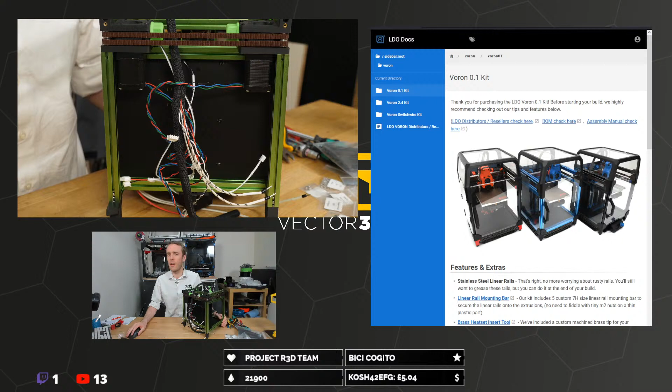It's wiring focused on the bulk of the wiring. So because we've got this LDO kit and they've done a good job getting everything pre-prepared with the wiring, they do have their own little extra guide that you can follow to help you do everything according to their setup. It's not massively different, but it should be a little bit helpful.

So in here, this is in the video description by the way, go into the wiring guide. It's like all of this stuff's pre-wired, so just enjoy. Basically I have got the normal guide on the other screen, which you can't see, so if I need to reference that I can, but hopefully won't need to.

I do need the wires though, they're over in this box over here. If I don't have any wires, wiring does tend to be a bit difficult. And there is, of course, a printed part for this as well, isn't there?

Don't know what I've done with that. There's a big green box somewhere. I've got a green box and I've got a black box, and I've got some mounts, and I've got some power supply covers. So...

This is a box of wires. That's the mains thing, that's a cable, that's a Raspberry Pi, that's a 5-volt supply. SD card I don't think we need at the moment. We do need this, we do need this, we need a control board, we need a cable management-y thing.

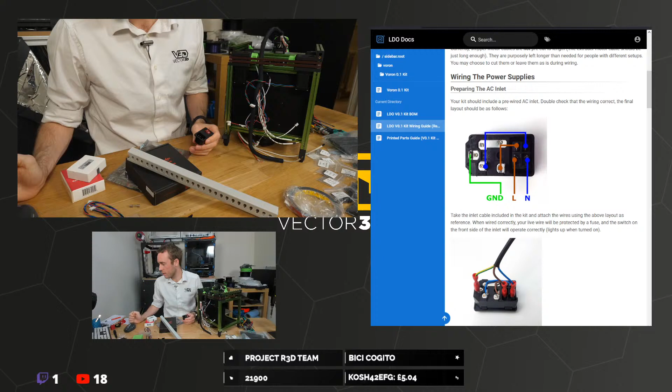Okay, this bit looks good. Attach the wires above using that when wired correctly. So we've got hopefully some.

Let's put that fuse away, don't need that. I think 3 amps or so would probably be right, 1 amp's definitely not enough. I don't know, I think it'll be okay.

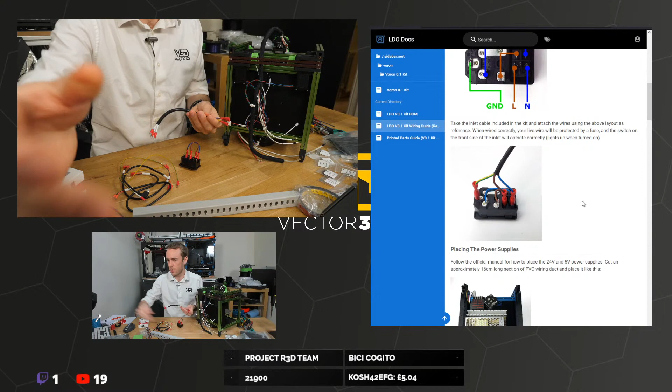So we've got this, so we've got a short harness for mains wiring, nicely labelled as well - ground, live, neutral. All the right colours, all nicely crimped. Very, very nice. So we've just got to make sure we stick everything in the right place.

So brown, obviously opposite brown. Bit fiddly with everything already in the way. Blue goes opposite blue. Keep that earth one out of the way.

Oh, this is a bit tight. Oh, come on. There we go.

The very important earth as well. These are very tight.

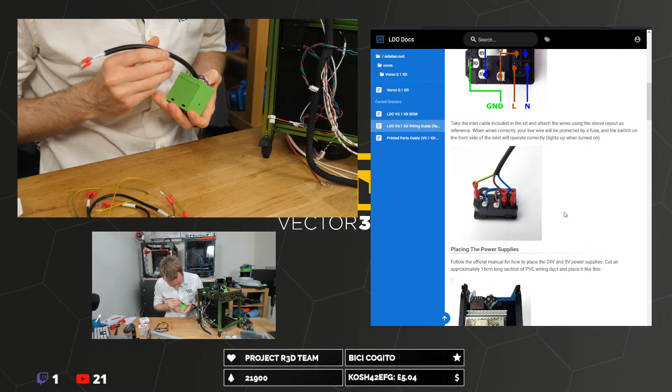There's a screw hole or a hole of something there. Hopefully that's - dunno. Not going to be difficult now that I've put that in. Oh, it's a heatset insert. Okay, let's do that.

And we're going to need to choose the right ones of these as well. That definitely looks better than that one. This one looks a bit under extruded, strangely. So I might go with the other one, so that and that. These can go away. Don't need that bag. Don't need that.

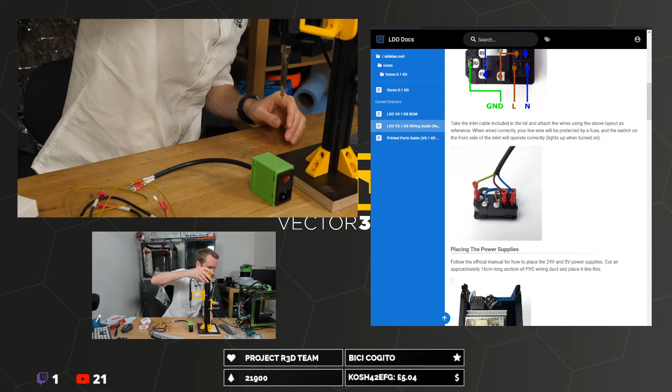Okay, this looks ready, so let's put this in. Easy peasy. So that's that part ticked off.

So for, it's now saying follow the original guide for some of these bits here. So if we switch to - we need to turn on PDF and off this. Yep, so it's kind of, I feel like I'm going to be following two instruction manuals at the same time here.

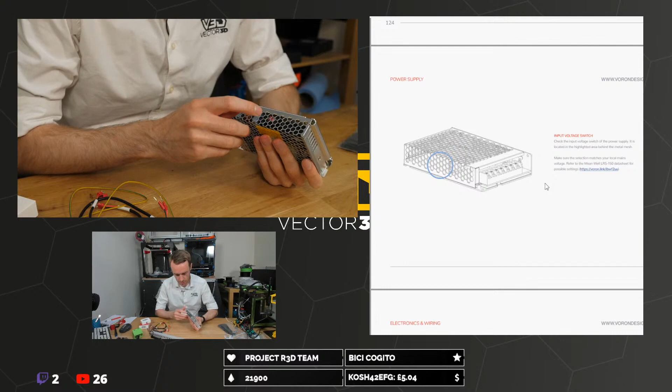So firstly, check the switch, set to 230 volts, so that's good for me in the UK.

VHB tape is double-sided and sensitive, pressure-sensitive adhesive tape. Other vendors have similar products that can be used as substitutes. Support the deck panel with one hand and firmly press the power supply against the panel to achieve a strong bond. Should you distrust modern adhesives, alternatively you can mount it by drilling 2 holes in the deck panel.

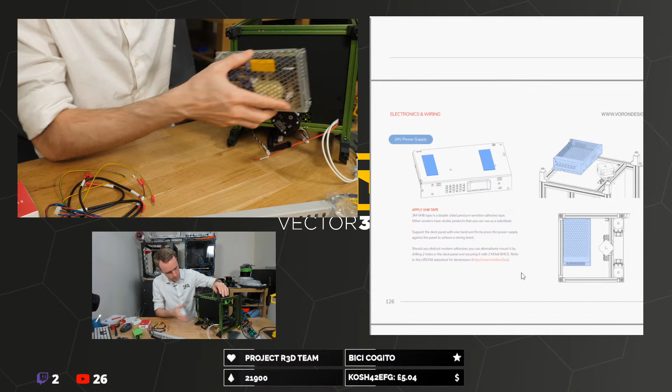So, which way round are we looking at? So the back is closest to that side, so it looks like that position there, up in that corner, press it down. We're going to need to move the bed.

Okay, so where's my tape?

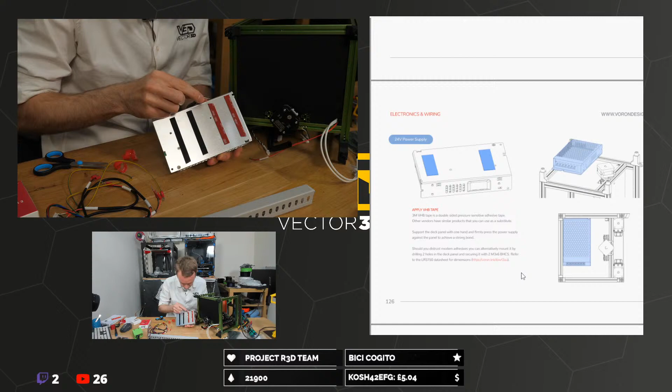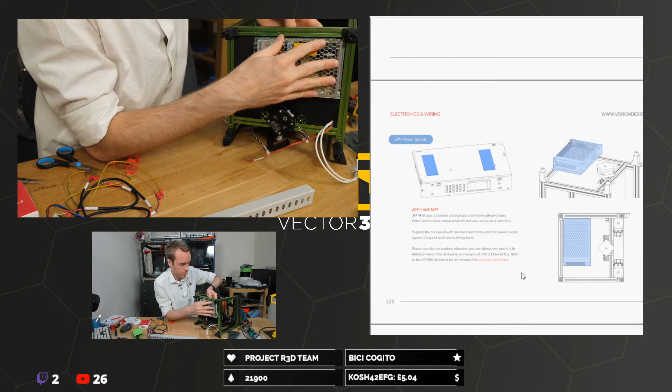I don't want it quite touching the walls. I want a little gap just to prevent any contact if it's rattling or something. Oh, that's just spun round. There's nothing to index the position of the feet, so they can just spin, which is kind of weird. Guess I could do it a little tighter.

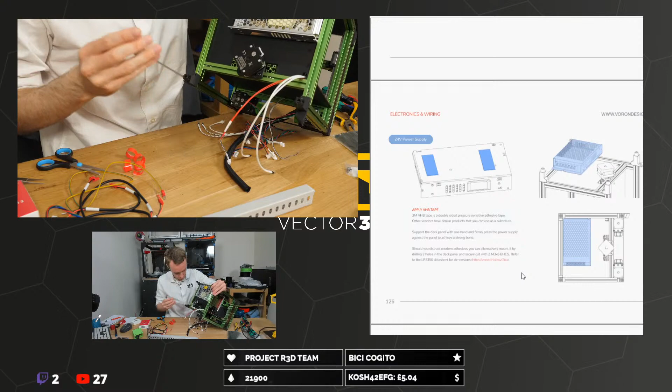I don't think I used any Loctite on them, which maybe is why if they're coming loose already, that would be a bit weird, but...

Okay, so now we've got to mount the 5-volt power supply as well, a 5-volt DC-DC converter, so we've got a little thing for that. Where's that little box? Over here. So this will take in the 24 volts of this power supply and convert it to 5 volts for the Raspberry Pi.

And we're mounting this up the other way, so let's turn this upside down. It's coming up here, so somewhere about there by the looks of it. It looks like we've got 2 nuts in here, so it's going to be using those, and we want some M3 by 8mm screws. Still got loads of those.

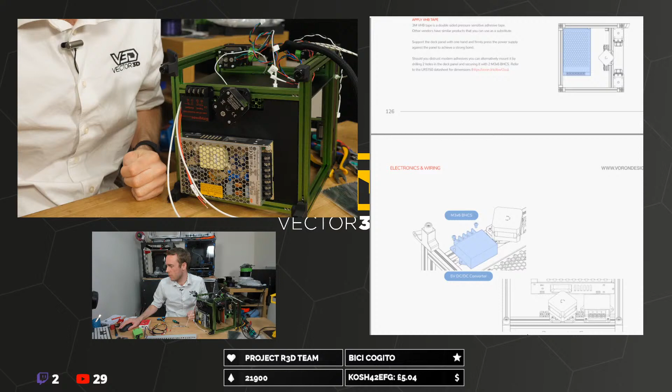16cm long, so I'm looking at the other instructions now. We want a 16cm long piece of this. 16cm is at this notch here. So how does one cut this appropriately? With a blade, cut it easily? Don't feel like a blade is the intended cutting method, but it kind of works, I guess.

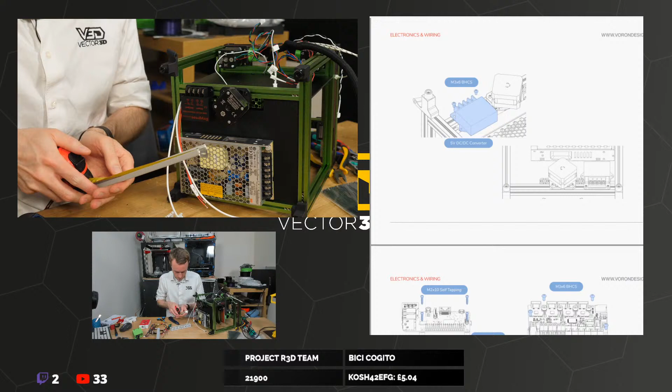Oh, the 2 sides don't align, that's inconvenient. And then we need a 16cm piece of this too. We could use some side cutters or something, might be a bit easier.

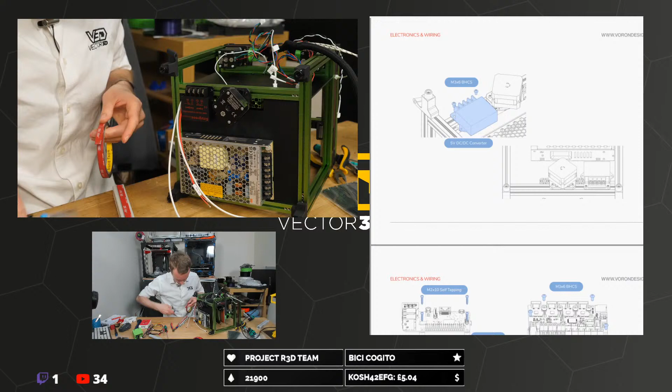So now that we've got this, we need a bit of extra tape to stick that down. Yeah, a little hacksaw probably would have been appropriate, but you know what, this works. Blades are just easier, aren't they, sometimes? Well, it was not really easier, it was just closer. Not particularly a great justification for using it, but there you go.

I'm going to cut this wobbly bit at the end off. So that looks like they want it right in there. It's probably a bit too much VHB tape for one tiny little duct, but...

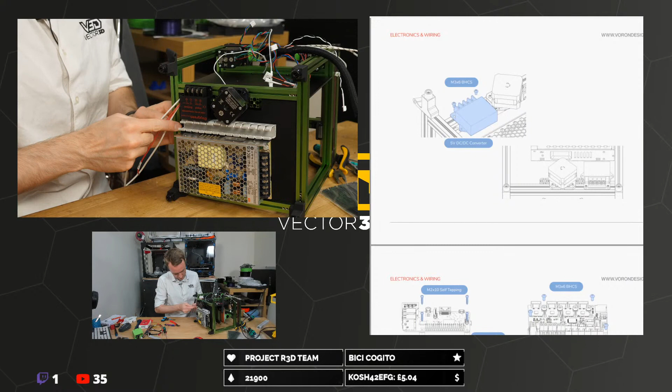Sliding your finger through that's kind of painful. That's probably not recommended, the inside edges are quite sharp.

Let's show this, hide this. So we've just done that, and we've got this in, and we've got that little duct part in there.

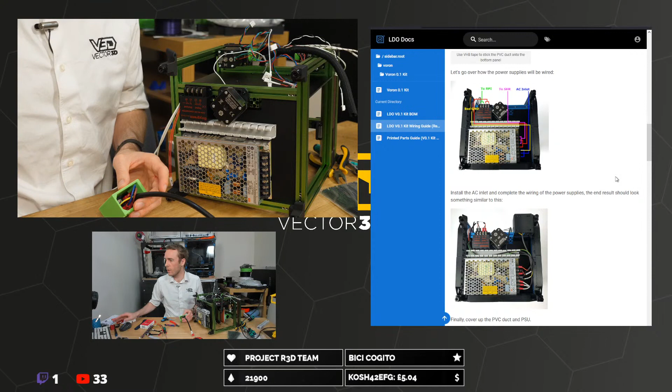So the AC inlet is 3 M3x8s. I know you want to build it stock first, but I would recommend the utility belt top hat mod. It adds a bit of height for the cables to the mini afterburner and PTFE tube, plus LED mounts. Nice!

Well, as I'm going to start testing the two printers behind me now a bit more intensely, I'm going to need some things to print, so mods for other printers is generally quite a good bet, I think. Let's get these in place.

So you've got holes in the top here to help you screw things in, but my drivers are always too fat, which is kind of unfortunate. But I do have a normal Allen key here, and that should go through okay. Yeah.

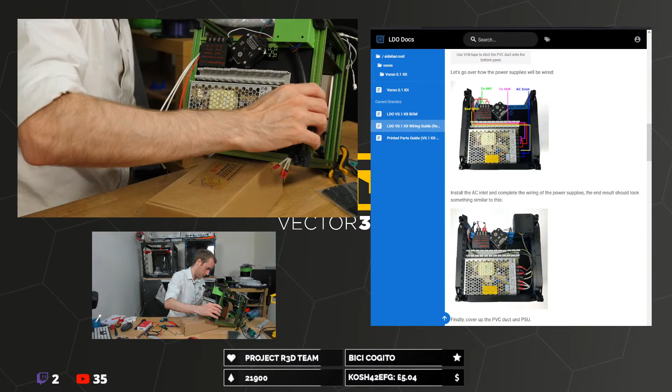So let's get these in. This is long, I guess we can tuck it in once it's installed. Where's my little screwdriver? That needs a crosshead thing. There we go.

We've got spade terminals for this, so you don't need to take the screws all the way out, which is convenient. Earth obviously goes in earth. They are labelled, so blue is labelled N, neutral goes in the N slot.

I have no idea what the sound level is, because as you can see, mine doesn't work yet. Somebody else might be able to help you.

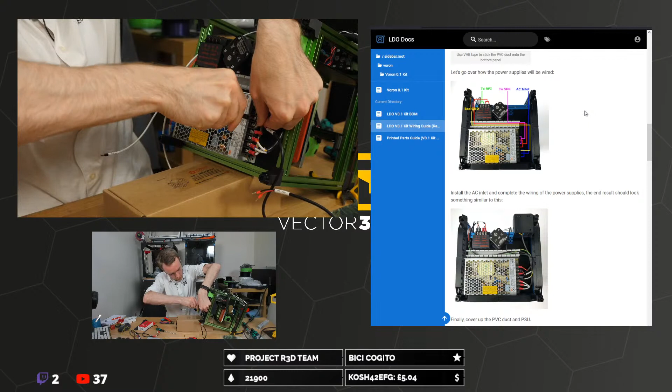One positive. I think we can probably stick that through there and then come out there. Something like that. And then I've got another one here. 24 volts into the 5 volt power supply, so a couple more terminals over here.

Do you have a multimeter handy for continuity testing after wiring? Yes, I mean, I could. I generally don't, to be honest. I can see why you should or could. It wouldn't be a bad idea, that's for sure. It's not something I've done before.

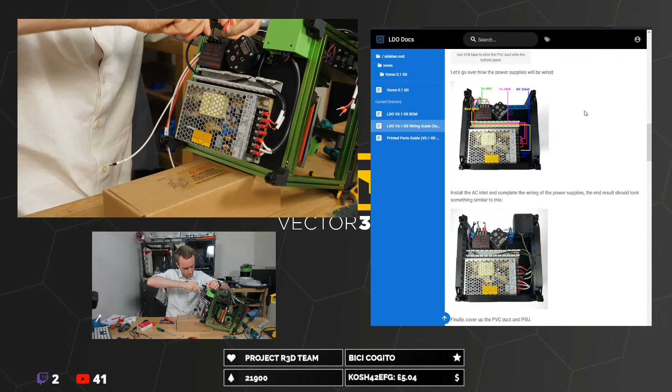So this is then going to come into the power supply up the top here, into the input section. And there. Oh, you can't see.

Let's do a ground test now, shall we? The frame isn't going to be grounded on this one, but it could be sensible. So earth is definitely connected fine, that's the main one.

Finally, cover up the PVC duct and PSU. Oh yes, so we can just stick it. I don't know how much extra length that one has. It's just easier to clip on or press on, who knows. Oh, missed. How did I do that?

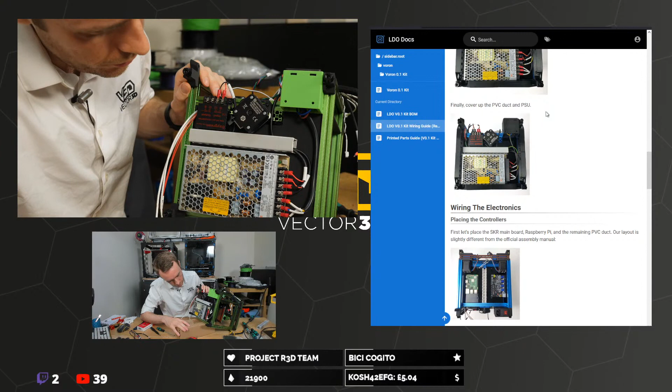We should have a little power supply cover as well. Very nice, that just covers up those terminals so you can't accidentally stick your fingers in there. So that's that lot, that lot, that lot.

Wiring the electronics. So we're moving to the normal back panel area now, so we can take this box away. That's empty, so that can go down there.

Oh, it's sitting on the plus. I was like, what on earth is... There we go. I think I might move that out of the way for a minute, hopefully it might make this initial step easier.

First, let's place the SKR mainboard, Raspberry Pi, and the remaining PVC duct. Our layout's slightly different from the official assembly manual. Okay, so presumably they are still mounting them on the little things though, so we need to put our...

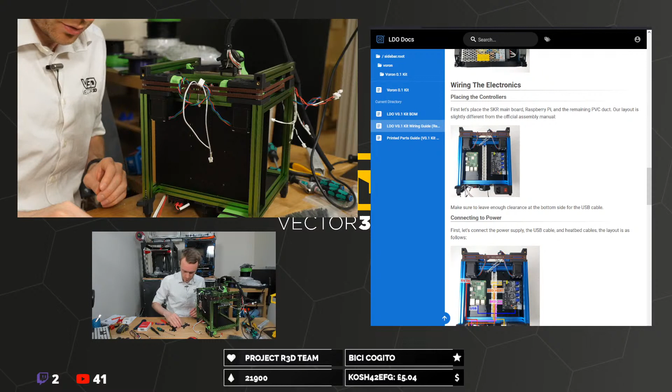Weirdly, these have like screw holes as if we're going to screw them down. It's hard to see if they've actually... Oh yeah, they are screwed onto a thing, okay. But we've got screw holes in it as if they're going to be screwed onto the panel, which would be lovely, but no siree.

Oops, daisy, sorry for that. That's going on here. And the Raspberry Pi's just here. Hello? Open here, okay.

I didn't do my Raspberry Pi power cable. Let's put this in, all the way around this way.

So, presumably that's going to go on there that way around. And this is going on.

It has the weirdest hole pattern, this control board. Like so, okay. So how does it suggest we screw these together?

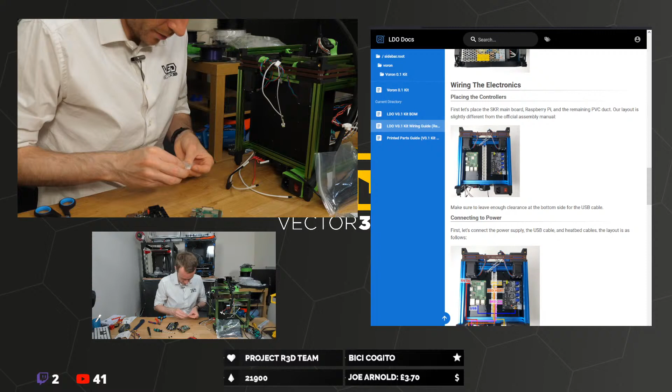So... bloody ball ends.

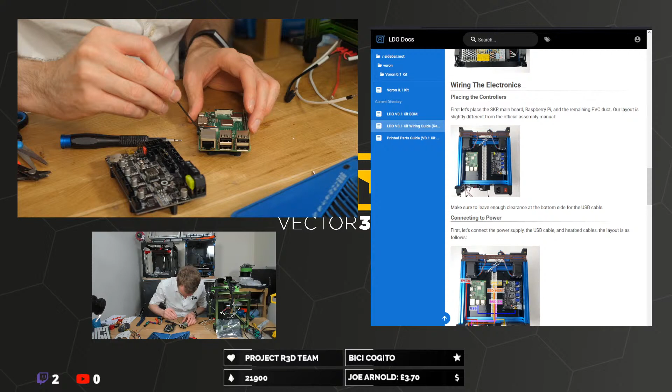Weird. So I wanted to try a different hex for these screws, because the 1.5, which I believe is what they should be, is really loose in here. I can wiggle it like 1/8 of a turn without it even moving.

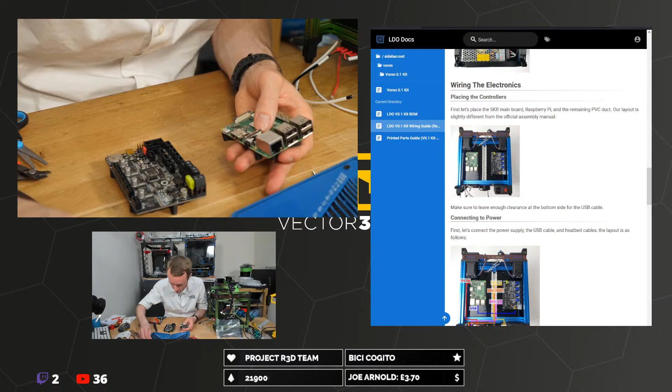So I was wondering if it's closer to an imperial size. No, 1/16 maybe, it's 5/64, but that one's missing. How about for here? I've got a 1.5 of this. Let's see if this fits any better. Well, this is a bit better.

And 36 people showing now.

The LDO kit does not come with a display, no. Display is actually not part of the default design, I believe. It's a mod.

These are really tight to get in.

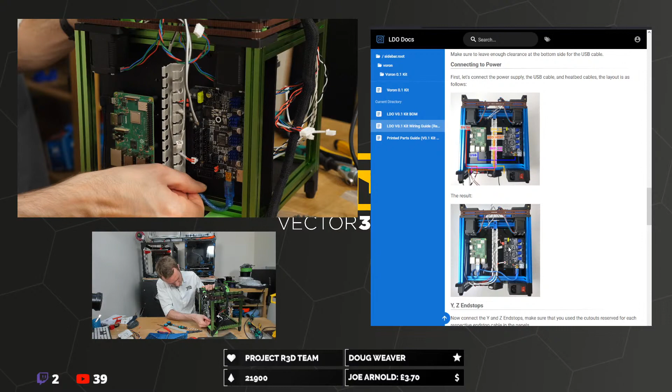That's good, not putting too much strain on any singular position. Now connect to the Y and Z end stops. Make sure that you use the cutouts reserved for each respective end stop in the panel.

Oh, I've not done that top piece of cable, that top panel in here. I don't have this on yet, or this bit, so maybe we should go back to the normal manual for a bit. Bring back PDF reader and hide this.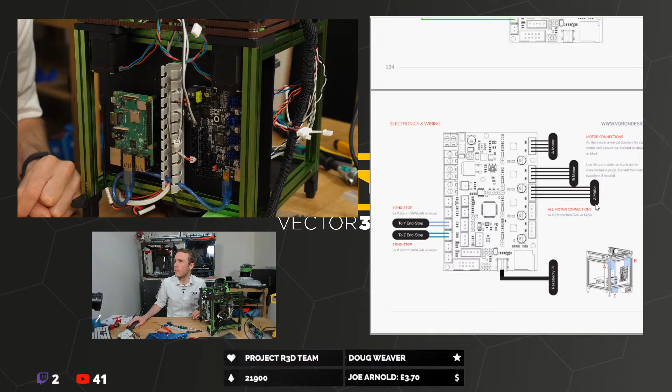So this was power supply, control boards, position them in, obviously slightly different to that. Mains we did, that's all done, that's done, that's done. 24V supply, print bed, bed thermistor, that's done. End stop.

Gives you cover, and then it talks about this down here. So that's weird. Okay, well, official manual says just - it seems like a really random place for this instruction, considering we'll have wired everything by the time we put that in otherwise.

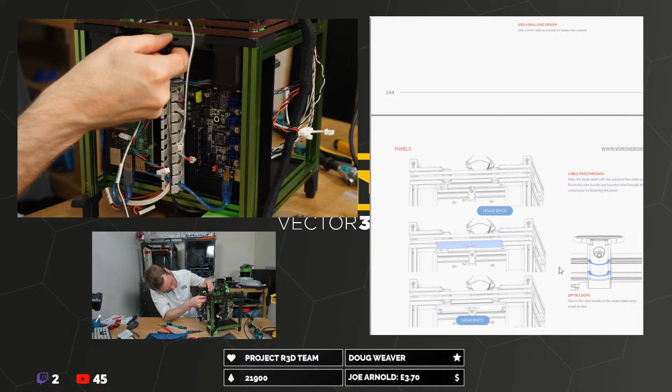So let's get this. I don't know how this is supposed to go in. There's no nuts there - that's mildly concerning. What the? Oh, I see, okay.

We also need that little cable management doohickey up the top there, so I've got to find that from somewhere. Oh, we've got a black one as well. What do we think, black or bright green? I think the bright green looks quite snazzy, doesn't it?

So an M3 by 10 screw to get that in, and M3 by 6 for those. M3 by 10.

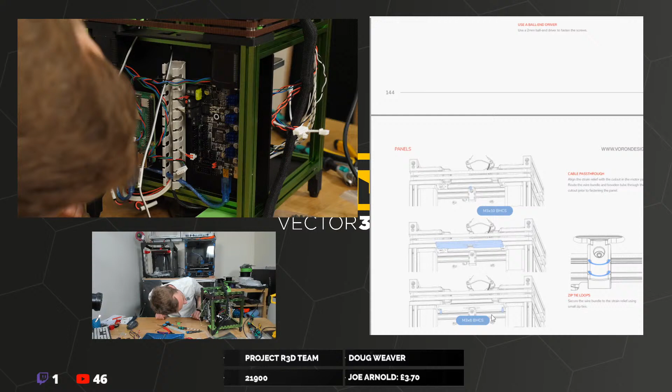Oh, there's barely any - I only want one, that's fine. We do, oh. Oh no, there's no nut! Is it hidden? It could be hidden somewhere. Oh, there it is. It does exist, phew!

Why is that not going to go?

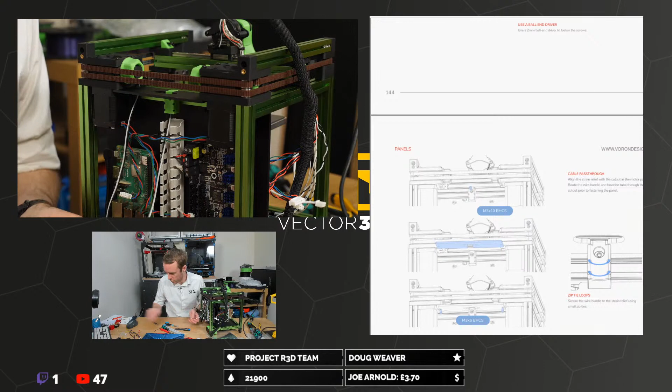Why does it not show where they actually plug in? I'm guessing it's right next to this. Z end stop - oh, I need the connector on the end of this one. And then Y is the one above it by the looks of it.

Oh, that's not good. Get out of there, you.

An hour and 20. This is taking a while, isn't it?

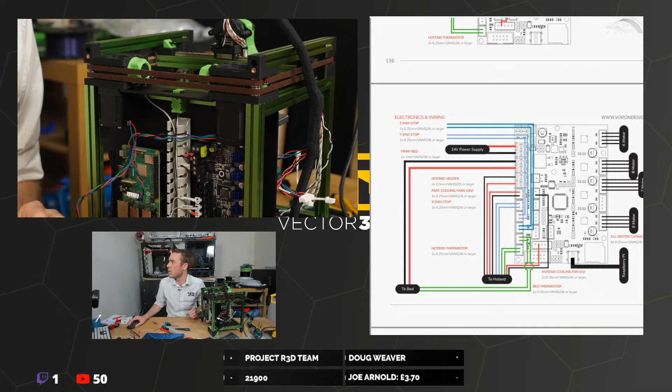So bed thermistor, Z end stop, Y end stop, and then X presumably. Okay. Oh, the result. Z, Y, bed - very nice.

Run the bundle of toolhead cables through the motor panel and straight into the top end of the PVC duct. So I've got some extra long cable covery stuff on this. Kind of want to know how long this lot needs to be before I can cut it.

No, this is just refusing to go anywhere but here. X end stop goes in here. Hot end thermistor goes down the bottom.

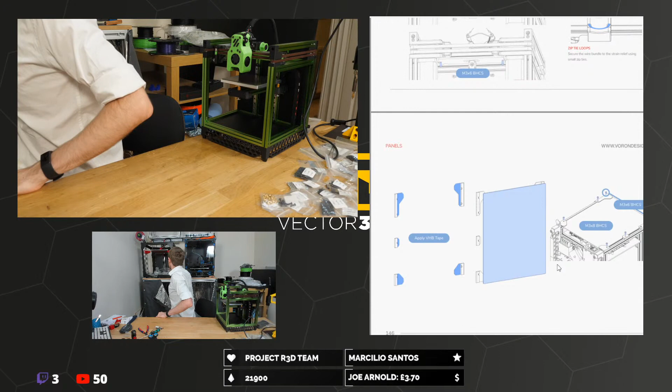What? Typical. What am I doing with them? Oh golly, my legs really hurt. That's what happens when you play squash. Oh, my leg. Oh, they stopped hurting while I was sitting down. They kind of went a bit dead. Oh, okay.

So, I've already attached the tape to all of these pieces. Obviously, there's lots of the red backing parts to remove.

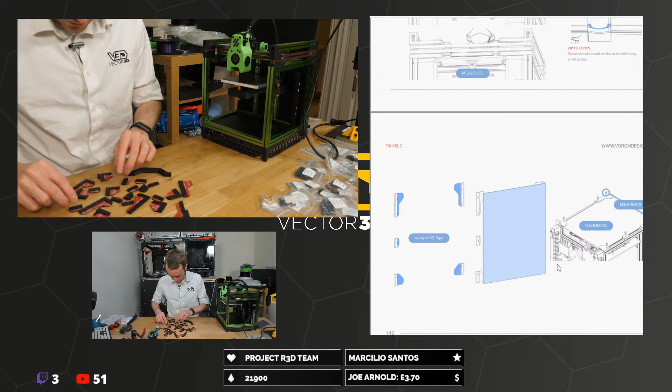Is squash like tennis? Yeah, squash is like tennis, but you fold one half of the court back on itself and you play it in a really tight room where you can run into the walls. And you both play on the same side. Not played for like 5 or 6 years, so it was quite exhausting.

I keep adding capabilities with my printers because I want to print all of the filaments. I got a Core XY Hypercube style printer because it will be easy to enclose for nylon and ABS.

So the 2.4, no, this side, this is fully enclosed. So this is quite a good printer for fully enclosing. It's quite cheap to do, the enclosure. I mean, the rest of the printer is not cheap to do, to be clear, but enclosing it afterwards is relatively easy, because it's just panel, panel, panel, panel, panel, panel, panel, done.

I'm not familiar with racquetball, but I guess. Squash is played with a little rubber ball that you have to kind of heat up a lot to get it to bounce properly, kind of thing.

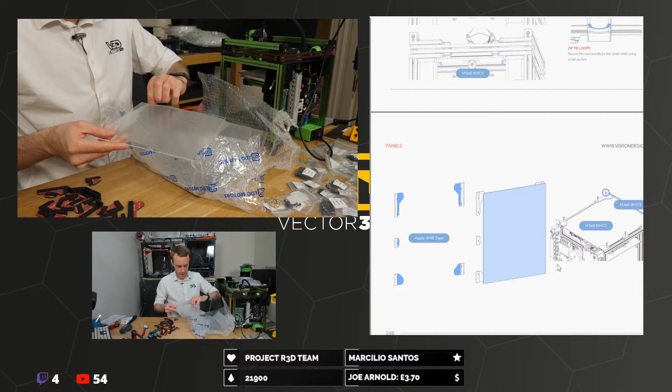So we've got the top hat, that's still to do. All the plastic on these panels, by the way, is going to look horrible and rubbish. It doesn't come like that - I've pre-peeled it and kind of put it back just so it doesn't scratch against the other panels. But it's just so that when I get to the panel, I can just rip this off really easily.

I have no idea what size pieces I want or need. I'm guessing it's all the large pieces, and the little pieces will be for the top hat later on.

So, this is the bottom, the underside, isn't it? So where are we - this direction. Don't know how that's going to screw in. No, this is not the underside - I've got confused there. This is the back. Yes, this is the back. This comes... okay, yeah.

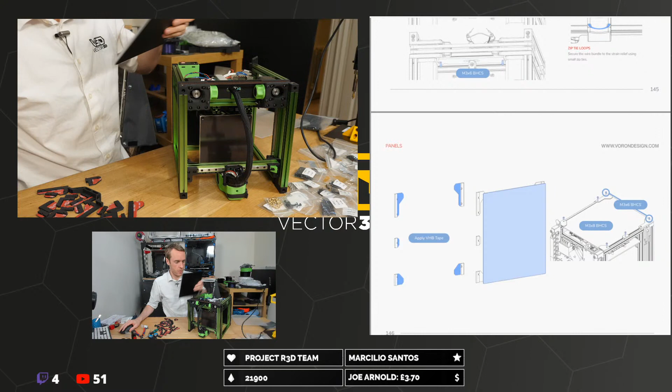So, I have no idea what panel... okay, that one looks like the door. The back would be sensible to maybe have a completely black panel. Are the others all the same size? No, that is taller, that is that, and that one's tiny. So is this going to be... I have no flipping clue which panel is which. It looks like this black one would fit here, because it comes all the way to the top. Let's check - if we zoom in, might be able to see. Yeah, that looks appropriate - that's the only panel that's going to fit all the way up there.

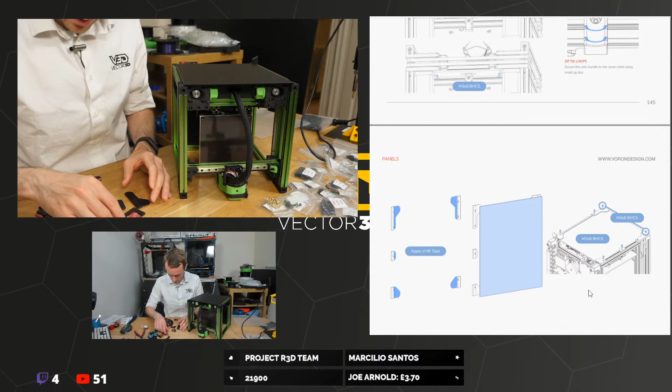And then we need to work out which parts go where. So it's not that, that's got a hinge, that's got a hinge, that's got a hinge - so that's the door. That's also part of the door, that's also part of the door. And then we've got two - I mean those hole patterns are all over the shop. That's a left and right of that, that's a left and right of that, that's a left and right, oh no, that's different again. Have I got enough parts? I feel like I might have not printed enough.

And these are all the same. So for this back panel, it looks like we want those two, and one of these for some reason, and not one on the other side. Why would you only want one? There's not one here, that's bizarre, isn't it? And then two of these that have one hole. Hopefully I've got too many of these rather than too few. This has got a bit of extra sticking out. Oh, this is here.

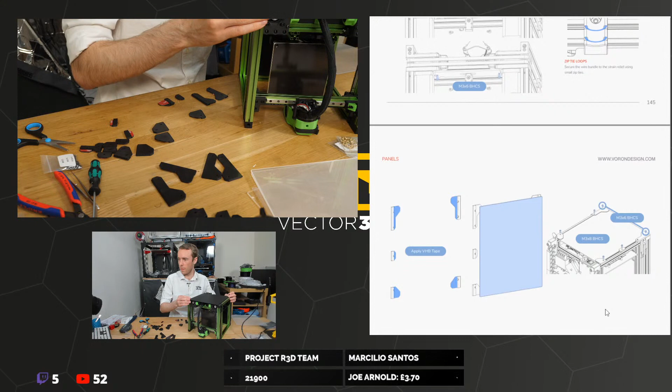There isn't a measurement for the panels. There might be, but I'm pretty confident in this one now.

I think I might have printed the wrong thickness for these. No, maybe not, just going to bend a bit. We'll see how we get on.

So I've got to move these all into position. So it's what? That's going down here. That's going in the middle, so something here. This is going up the top, so that's going there.

I did get all the right parts, because I checked, since the LDO panels come in different thickness pieces. So I thought I got all the right ones, so hopefully we're okay.

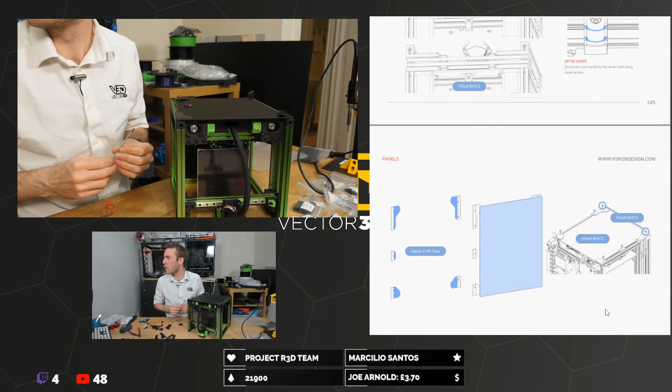What we're screwing in with, 3x6 at the top. Oops, amazing.

There's my big fat bag of M3x8s over here. Oh dear.

I guess I could glue these, stick these to the panels and then get it in place. That seems a bit risky.

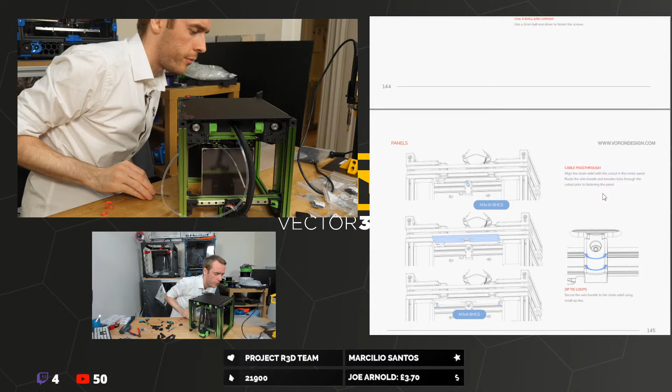We should do another ad's. Did we do? I forget, how did I start forgetting? I keep forgetting how many ad sections I've done. I think I've done 2. Haven't I? I did one just now before we did these panels.

Was it 30 minutes ago? I don't know how I keep forgetting. I need to have like a counter just so I can count to 2. That's pathetic, isn't it?

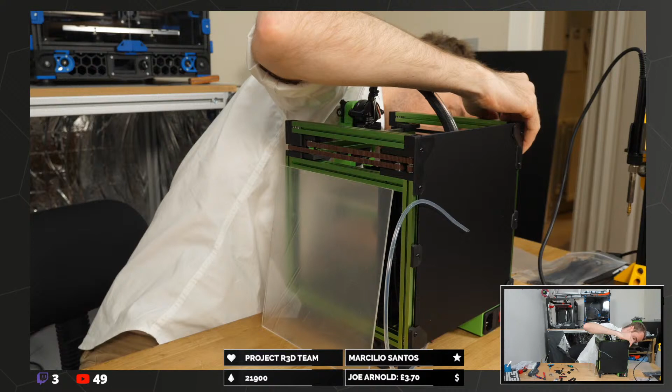Looks like that goes on there then. Does this go this side? What's this one for? That's the door. So door will go on the front.

So this... what the hell is this panel for? Oh, the top of the hat, isn't it? That's what it's for. Of course.

To be honest, just a copy of the front door design that goes on the back would be enough, maybe. Don't know if that's possible. Doesn't seem like, at the moment, there doesn't seem like any reason not to have a door.

Oh, does this go? It goes up further, that's why. So it's going to be one nut over here, one in the middle, one over here, one here, one in the middle, one up here, one over here, one in the middle, one over here, one down here, one in the middle, one up here.

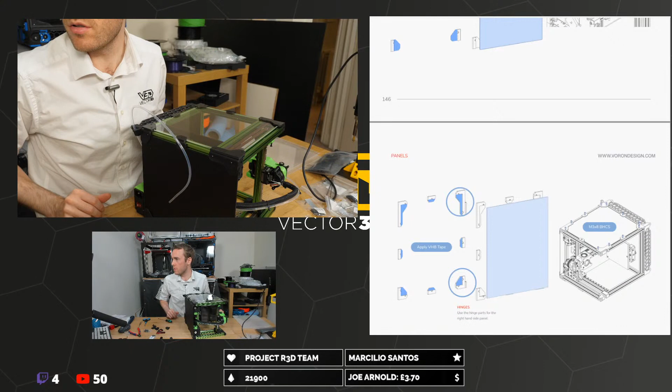No, there's no foam tape, just these sticky bits.

The difference between this and the 2.4 is with the 2.4 you've got moving stuff that's right close to the panel, so you have to space it off a bit. I think that's part of the reason for using that foam tape. Whereas with this design, everything that moves is well away from the panels.

I haven't checked out the VZ bot yet. I do intend to.

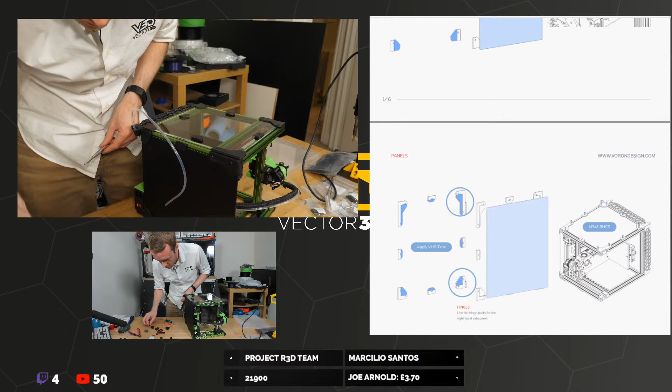That one's not stuck on yet. Is there one at the top? 1, 2, 3, 4. Yeah, it looks like there's only 3 left then now. I might have messed up. Or was there? Oh no, because you've got the door on the other side, so I guess it's slightly different.

Okay, so are these all M3x8s? They are.

These are all not long enough, I think. I'm going to go find a bunch more M3x10s if I can.

Oh, did I just put... I think I just put 8s in the 6 bag. Yeah, idiot.

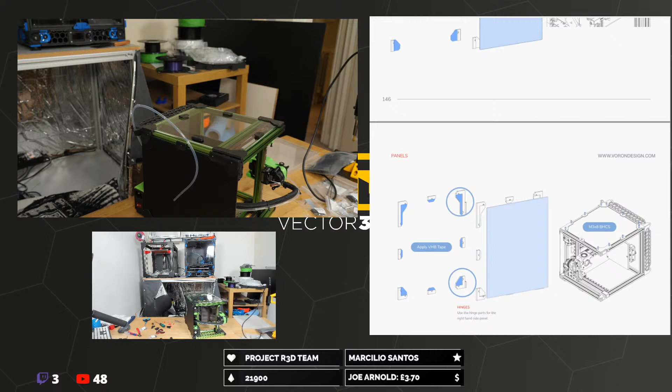Right. Bunch more screws, so hopefully we can do all these with all the 10mm screws instead.

I think the 8s are fine for 2mm thickness panels, but I think the LDO ones are all 3mm, so the 8s just end up not quite long enough to grab the nut. If you flip the whole printer upside down, that might help you grab the nut, but...

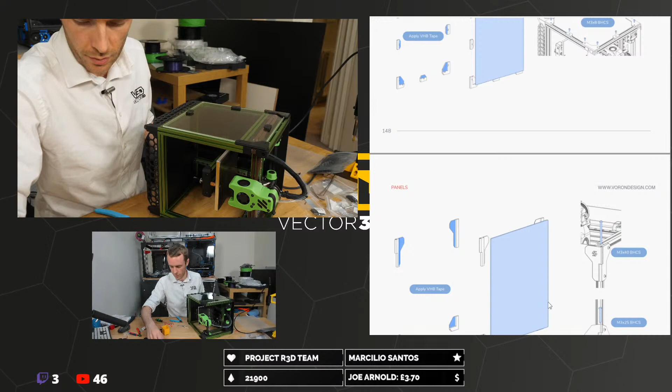Do I have all the right pieces? That goes there, that goes there. No, I don't, do I? 1, 2, 3. Need numero quattro for that. Excuse me. And then there should be that, that, that, and that for the door. We're one piece short by the looks of it. So hopefully...

That one looks horrible. Oh, that one looks horrible too. First layer obviously was not great for this set. They're all a bit gappy. We'll put that around the back.

Oops, is it? Could cut the 10mm screws down a bit. Give the 8s another go. It's in.

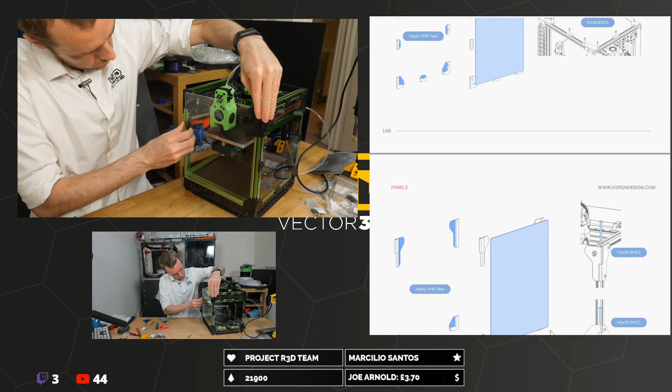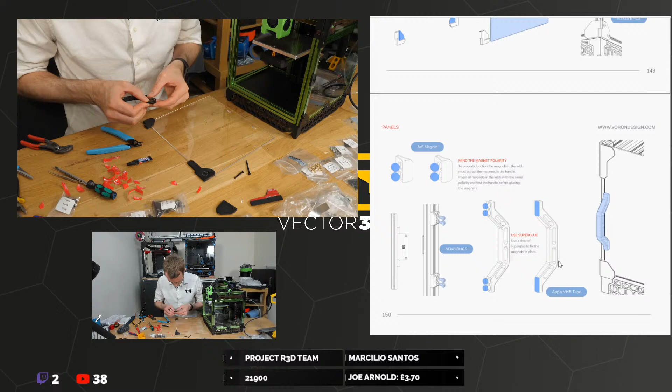I might just splodge some glue over the top of these instead. It's not clean, but should work okay.

Frickin' magnets, man! Did they need to go in here because my... why is there a pattern on the panel? Are they not going to work like this? Have I made a big mistake? That looks okay. I think it was intended for this whole pattern in the door to be used for the magnets, wasn't it?